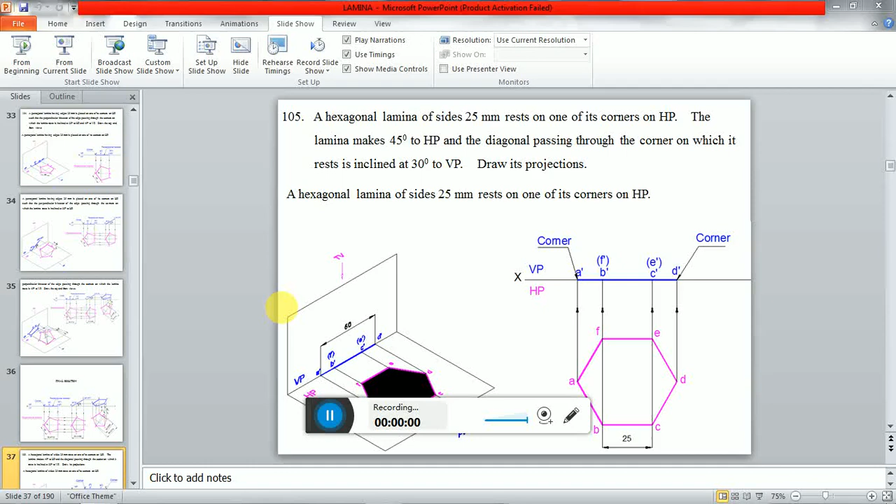A hexagonal lamina of sides 25 mm rests on one of its corners on HP. The lamina makes 45 degrees to HP and the diagonal passing through the corner on which it rests is inclined at 30 degrees to VP. Draw its projections. So he says a lamina of side 25 mm rests on one of its corners on HP.

Since the corner is resting on HP, obviously we have to start from the horizontal plane. So the horizontal plane will be viewed from the top view, as it rests on HP. When you look from the front view, since the surface is parallel to HP and perpendicular to VP, we can see that there is a line here.

So we have to place the lamina in such a manner that the corners should be the extreme points. That means the extreme ends should be a corner point. So two of the sides should be parallel to VP. That is how you should be able to place the lamina.

Now, here is a side of 25 mm. We have to keep it such that the corners are placed at the extreme ends, and all the sides are resting on HP, because he says one of the corners has to rest on HP. So first we have to place all the sides to rest on HP. How do I know that it is resting on HP? When you look from the front view, the line will always be on the XY line.

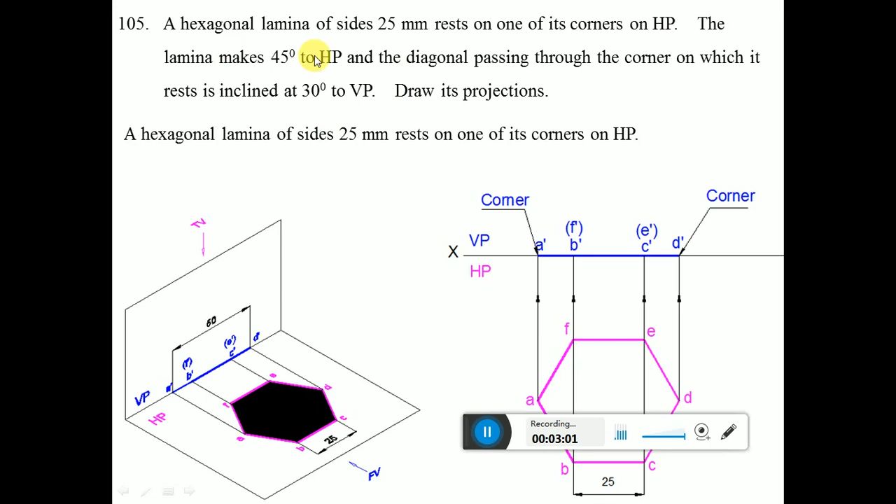Now the hexagonal lamina makes 45 degrees to HP. That means the surface of the lamina makes an angle of 45 degrees to HP such that one of the corners is resting on HP. You can see here A is resting on HP. From the front view, A dash is resting on HP such that the lamina makes 45 degrees. So you are rotating the lamina by an angle of 45 degrees.

From the front view, you can see the surface inclination with respect to HP in the vertical plane. The surface is inclined to HP, but still perpendicular to VP, which is why you are getting a line here. From the front view, ABCD is near the observer, so A dash, B dash, C dash and D dash are visible. E and F are away from the observer, so E dash and F dash are put in brackets.

Now, since the surface is inclined to HP at 45 degrees, naturally the diagonal on the surface, AD, that is A dash D dash, is also inclined to HP at 45 degrees. So this is the front view position, and when you look from the top view, the projected surface will be on HP.

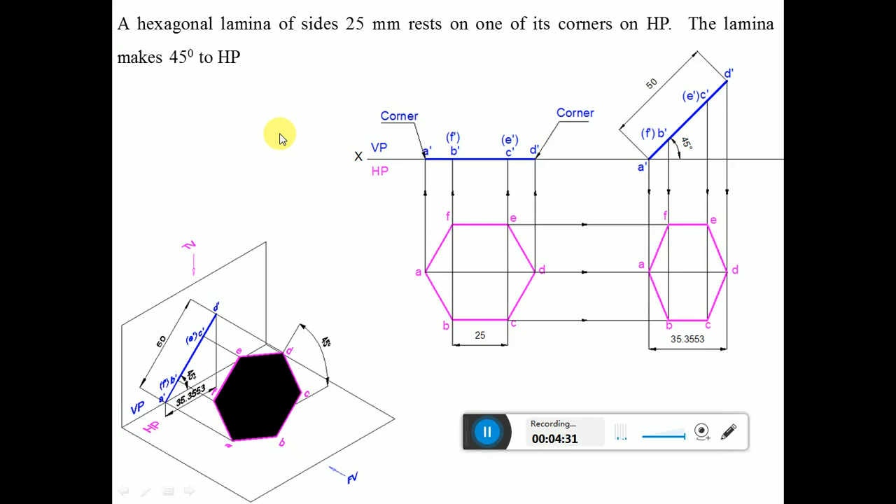So this will be the position you will get once the surface is inclined to HP. Naturally, when you look from the top view, you are going to see the hexagonal surface. It looks like the hexagonal surface now in the top view, and the diagonal passing through the corner on which it rests is inclined at 30 degrees to VP.

So which is the diagonal passing through the corner? That is AD. AD is the diagonal passing through the corner, which is inclined to VP at 30 degrees. So he has given the true inclination, but once it has been rotated by an angle of 45 degrees, the diagonal is also rotated by 45 degrees. So naturally you will get the apparent length AD here in the top view, but the inclination given is a true inclination.

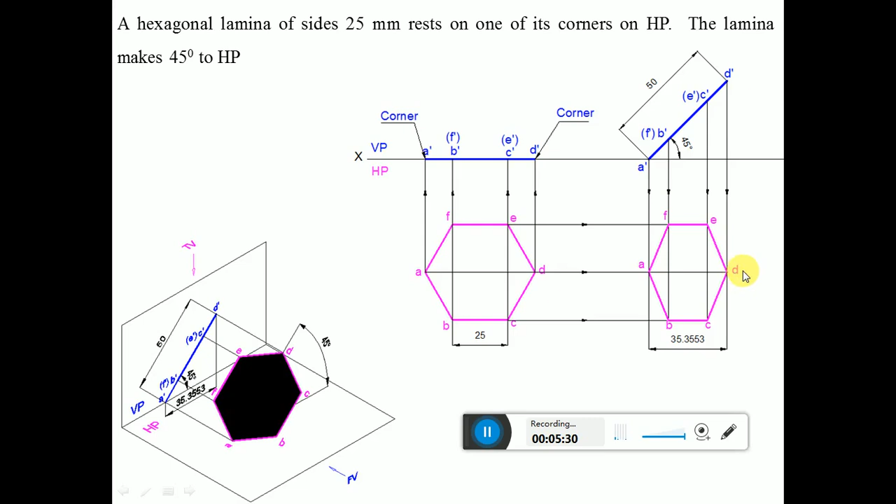So we have to find out the apparent inclination, because we have to reproduce the second position top view in the third position. In the second position top view, as the surface is inclined, the diagonal is on that surface, so naturally the diagonal is inclined. When it is projected, you can see it will be in the apparent length. Since the true inclination is given, we cannot directly reproduce the second position top view here.

So first consider any point, draw a horizontal line, and then draw a line inclined at 30 degrees to VP. This is the true inclination, so we take the true length of the diagonal from the first position top view. You can see the diagonal A'D', which is parallel to HP, so you get the true length. Or the diagonal AD, which is parallel to VP, gives the true length here. So measure the length from A to D, with A as center cut an arc on the 30 degree line and get the locus.

Then take the apparent length AD here, with A as center cut it on the locus which has been drawn. Then join this line and reproduce the second position top view in the third position on this beta inclination line, and then draw the front view. So this is how we can analyze it, and this is how it has been done.

So we have taken the first position top view and diagonal. We have written this is 50. Then we draw the locus. Then measure the length from here to here, which is 35.3553. From here you cut it, so that you get this. So on this line, you reproduce the sketch as it was. That will be the beta inclination.

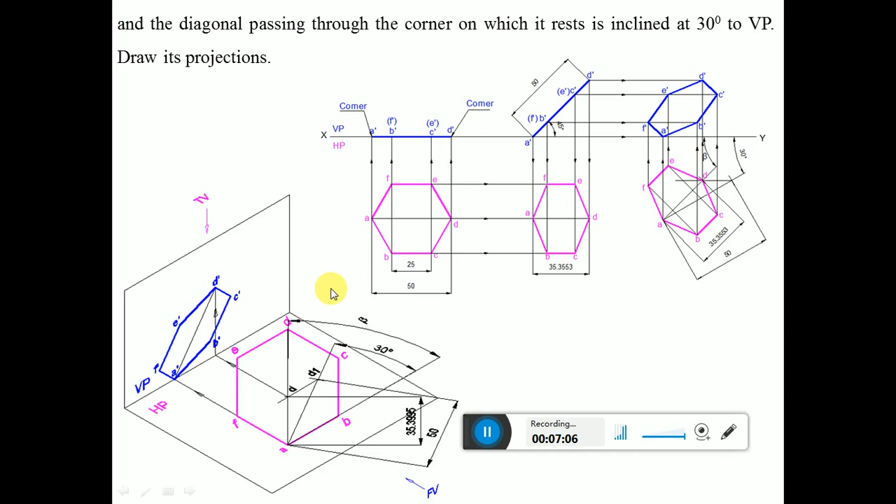Then you project these to get the corresponding front view. This position and this position will be exactly the same as in the image. So this is how we analyze this problem in 3D. Now we will draw the final solution in the sketchbook. First we draw the thin XY line and mark X, Y, VP and HP as shown.

Since the hexagon is resting on HP with a corner, we have to start from HP. The hexagon has to be placed in such a manner that the extreme ends are corners. That means two of the sides should be parallel to VP. Only then will the corners be on the extreme sides.

So first we draw a horizontal line and consider any point. From here take the radius of the hexagon, which is 25, and draw a thin circle. The thin circle will cut the horizontal line at this point and also at this point. Then with A as center, take the radius of 25 and cut on the lower side and the upper side of the circle.

Similarly, with this point as center, again of radius 25, by using the compass, cut an arc on the top side and also on the bottom side. So we will get 6 points. Then mark the points as A, B, C, D, E and F. Then join A to B, B to C, C to D, D to E, E to F and F to A with a continuous dark line.

Then draw the vertical projectors from each of these points. Draw a vertical projector from A to the XY line, then B and F to the XY line, and C and E to the XY line, and D to the XY line.

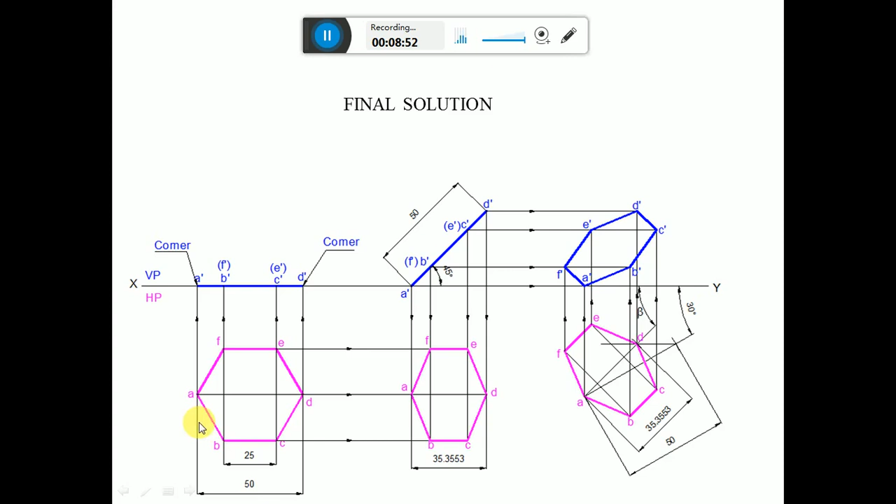Then mark the points. So when you look from the front view, A, B, C, D is near to the observer. So A dash, B dash, C dash and D dash are visible. And also E and F is away from the observer, so you keep it in bracket, which is E dash and F dash in bracket.

Then he says the surface is inclined at an angle of 45 degrees to HP. Since the surface is inclined at 45 degrees to HP, consider one of the corners on HP. So you can see in the front view, A dash is a corner and D dash is a corner. So either A dash can be resting on HP or D dash can be resting on HP. If you are considering A dash, then you have to rotate anti-clockwise. If you are considering D dash, then you have to rotate clockwise.

So consider any point at a convenient distance from the first position and mark this point as A dash. Then draw a line by using the protractor. You measure an angle of 45 degrees and draw an inclined line. Then by using the compass, measure the distance from A dash to D dash, and with A dash as center, cut an arc on this 45 degree line.

Similarly, you measure the distance from A dash to B dash. From here, you cut it on the 45 degree line. Similarly, again from A dash to C dash. From A dash, you cut it on this, so that you're going to get this point. So name the points A dash, B dash, F dash, C dash, E dash, and D dash. Then dark this line between A dash and D dash. So this is how we can reproduce the second position front view.

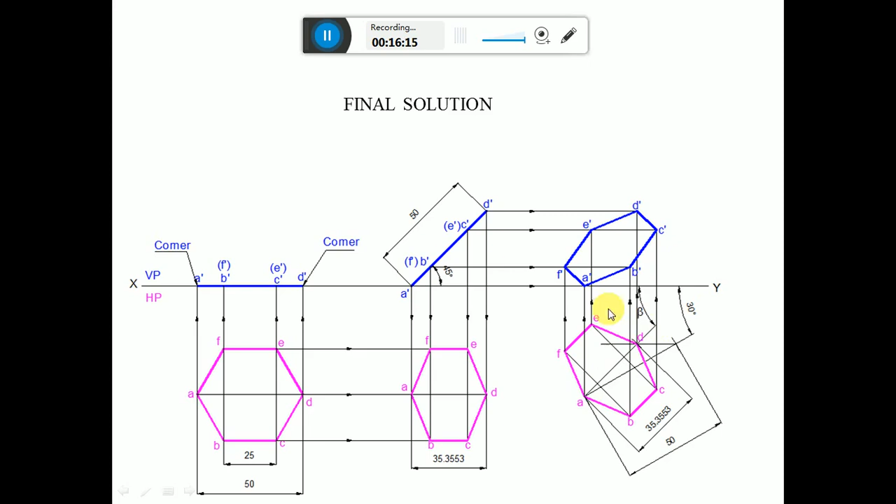So how are we going to check whether the solution is right or wrong? First, it says a hexagonal lamina of 25 mm side is resting on one of its corners on HP, such that the lamina makes 45 degrees to HP, and the diagonal passing through the corner on which the lamina rests makes an angle of 30 degrees to VP. You can see this 30 degrees to VP. Here it is the true inclination, but here you have got the apparent length. So we are finding out the apparent inclination, which is called beta. So denote that as beta. And finally you produce the third position front view, which gives the final solution.